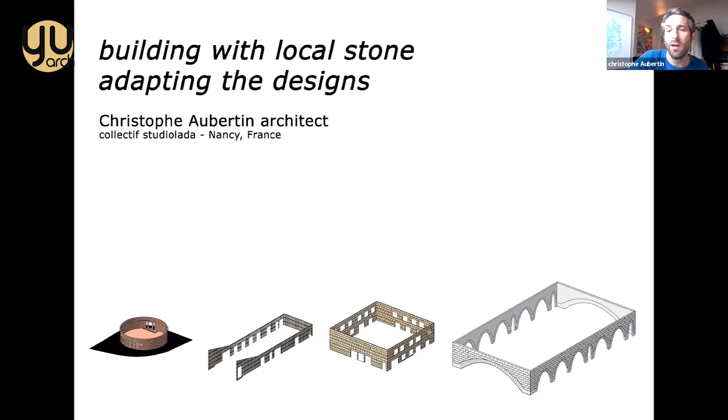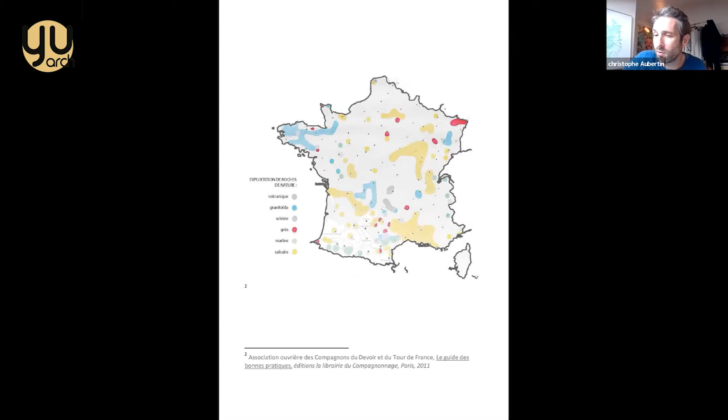And this is for footprint and sustainable conditions, but it is also because I think that it's interesting not to have the same architecture everywhere, and to find different cultural and different design materials according to the area where you are.

So, for example, we built one building here and one building here in Vaucouleurs, and we used limestone from this quarry very close by to build this one. For another building in the same area, we used this stone. So all this is very close, and these three buildings use limestone, like white stone. This one is in the north where there is a special limestone with a yellow color. So my partner Benoit built this building with this yellow stone.

And here it is another area. We are here, and here we use this stone. This is sandstone, pink sandstone, to build this building.

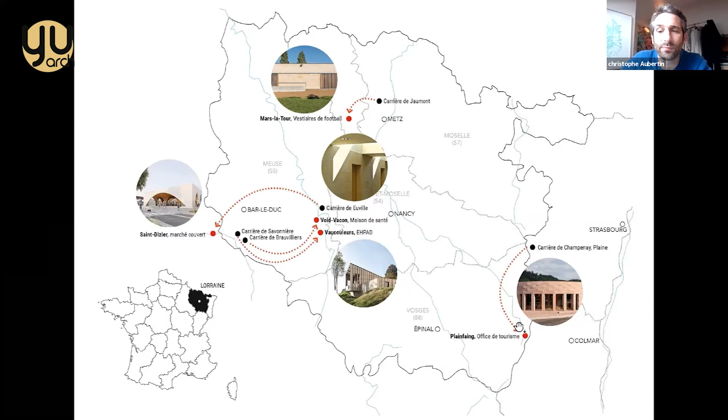Okay, so the first building that we did with stone was this one. It was 10 years ago, and it was a health center in a village in France, for doctors and nurses and this kind. And we were in the area of limestone. We decided to mix the timber and stone.

So we decided to put the timber outside. So a wall, like a frame, balloon frame wall structure outside with a lot of insulation, and to get the stone inside. So inside we just have this big wall like this, linear, built with stone blocks. And also the floor here, which is covered by tiles, stone tiles.

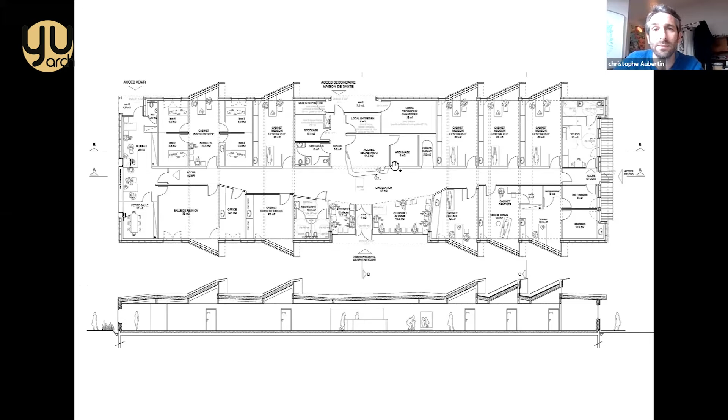So it's interesting to get the stone inside the building because we don't have to put insulation on this wall, so we can see it on the two faces. It's beautiful. It's quite expensive, so we prefer to see it on the two faces.

And also it is interesting for the thermal way, because when you have massive blocks inside, it keeps the thermal ambient inside. So it makes like inertia, I don't know the term, but it keeps the heat or the cold inside. Inertia, yeah, that's it. So this is our wall.

First, we wanted a wall like Gilles Perraudin, like 50 centimeters thick, but it was too expensive. And the good equilibrium was to take 22 centimeters. So we use this. In the bottom, we put 2 ranks of cellular concrete, because it cuts the cold coming from the floor, from the earth, so it doesn't come inside the wall. So that's why there are these two ranks of cellular concrete.

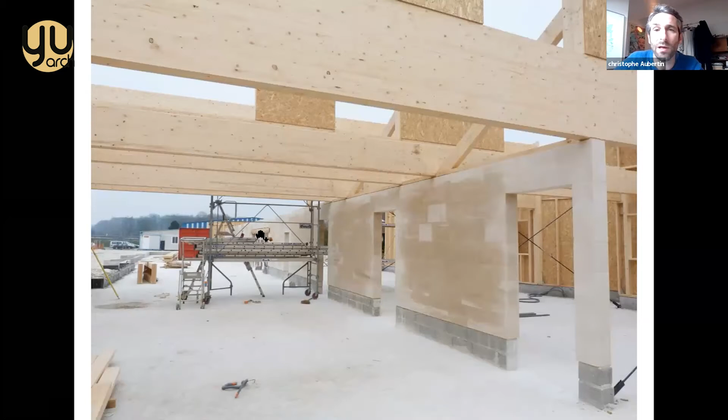And then it was really simple. We put these blocks, and on it we can put these big beams in timber, and the stone wall carries the timber beam. This is important. And one thing important here, we were not in a seismic area, okay?

But even in France, even in a non-seismic area, the new rules tell us to put reinforced concrete in many places in a wall like that. So usually you have to put concrete inside the wall here. So you do a hole, and then you put concrete and steel inside. But in this wall, we could talk with the guys to check the normative things, and he accepted that this wall was only in stone.

And we had also guys to build this wall that are used to historical buildings, and for them it is not necessary to put steel. So this is only stone blocks like this, and this is the way that we finish the building with this material that is very important, interesting.

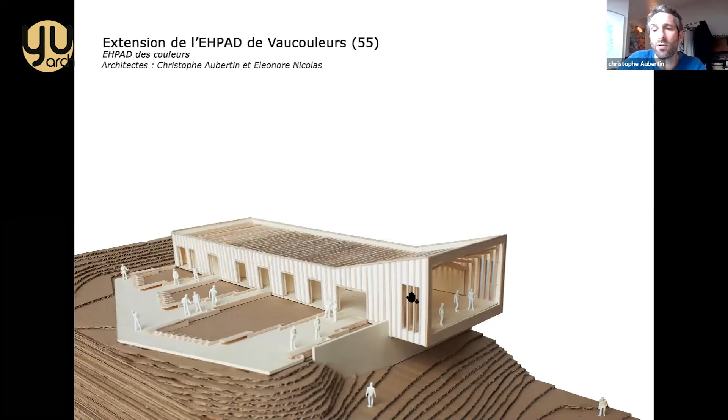So the next project is in the same territory, in the same area, like 15 kilometers from the first one, and it is a building for retired people. And here it is just an extension for the big retirement center. And here we decided to use stone again, because we are in the area of stone, and there are some quarries. And we decided to build in wood.

And also the director of the client, for the users of the building, told us that they don't want wood cladding outside of the building, because they don't like how timber will get old and get gray and all that.

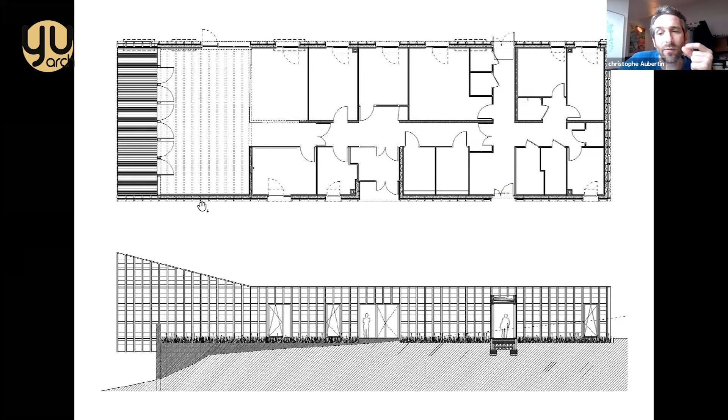So we decided to do the opposite of the first one, and to put only wood and timber inside, and to put the stone outside with only cladding. So this is stone cladding, but coming on a wall with a timber structure.

So this is not simple. This is particular because usually you can put stone cladding only on concrete walls, because concrete walls are very strong and they don't move. A wall in concrete doesn't move at all. But a wall with timber structure always moves just a little bit, and this movement can make a problem for the stone, because it can make a torsion and it can break the stone.

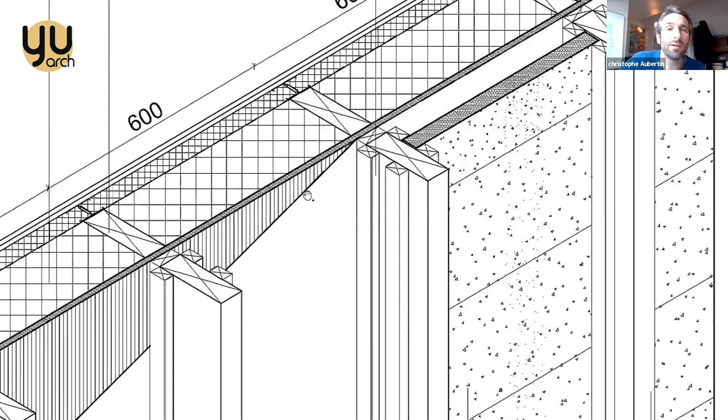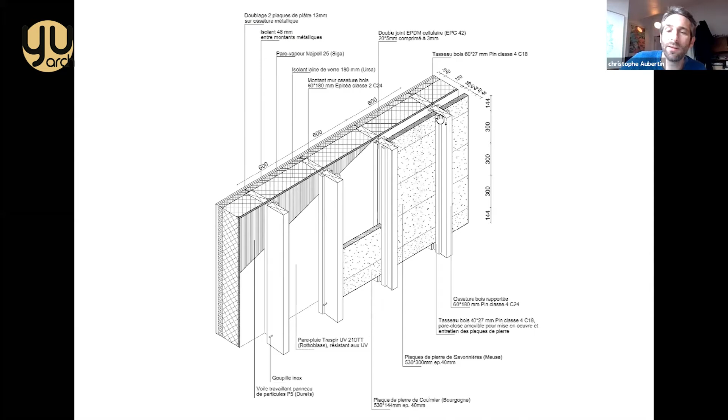So we had to propose this way. This way is quite simple. It's only to put wood columns on the walls with two little pieces of wood, and we put the stone tiles inside this small place like this, and that was not common. So we had to prove it and make a special certification to explain how to do it.

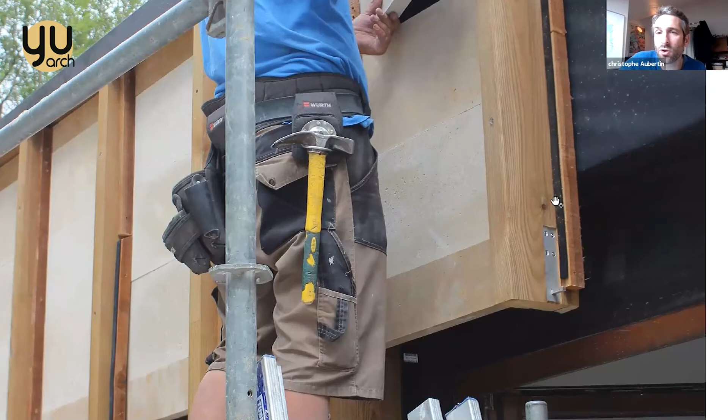You see this black thing is a joint in EPDM. I don't know how to tell it. It's kind of plastic, but a kind of joint to maintain the stone and to be sure that it will always be maintained and not get problematic. And this small piece of steel also carries the stone.

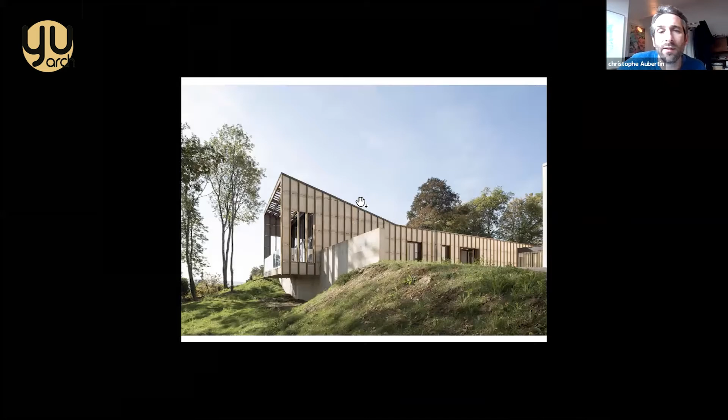So this guy is on the way to put the stone, and then we get this kind of architecture. So we have a wood building, but outside we get the stone tiles on the facade with these lines. This is very important. These vertical lines in wood.

And I think that this kind of facade is very interesting, and everybody was happy, even the users that don't like wood. This kind of solution with like 10% of wood and 90% of stone is a way that everybody loves. It's only natural materials, and it will get old very well. So that's why it was interesting for us to try this way.

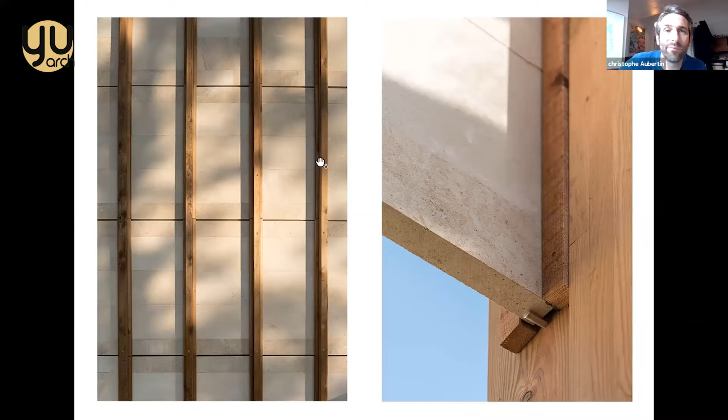So you see that you get small joints to get the ventilation coming on the backside of the stone, and to be sure that there is no humidity, water coming in the wall like that. So that was a way to use stone also in an economic, pragmatic, easy way. We just used it 4 centimeters thick, so this kind of cladding was not very expensive.

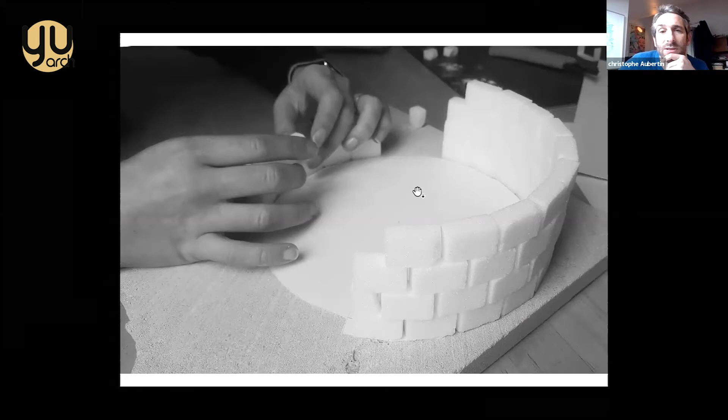Then the third building was another one. So we changed the area. We are in the mountain, and in the mountain we get this sandstone, a pink sandstone. And this building is a tourism office, to inform tourists about what they can visit, what they can do, also the natural area of this territory. And we wanted a building that has a special architecture, like a signal. So we decided to do it in a circular form.

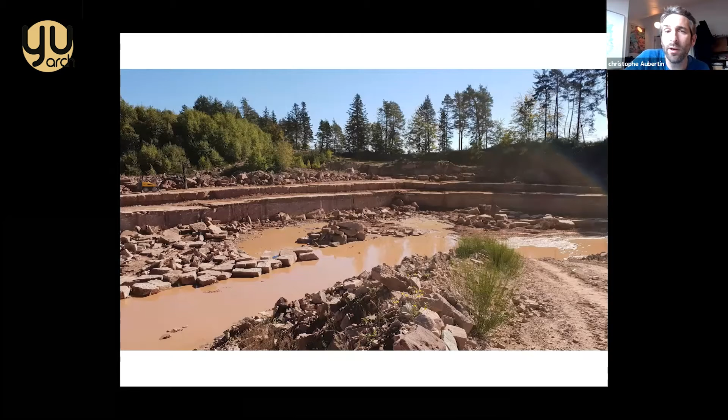And since the very beginning, we decided to do it in stone and with a circular form. And the only idea of this building is to use blocks and to make them in a curved way. So it makes this kind of, I don't know how to express it, but it's kind of shade and pattern.

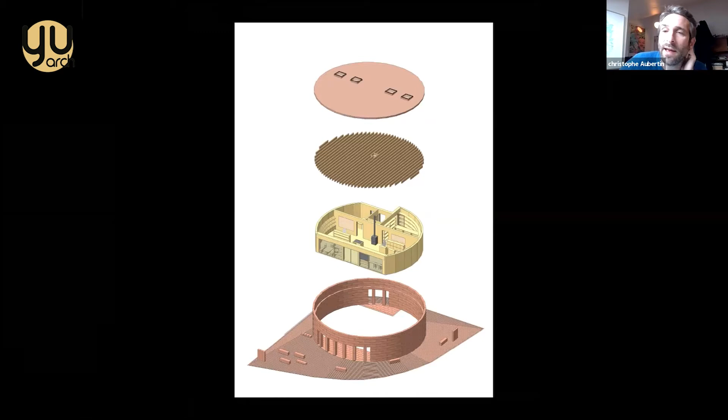And so we went to a quarry really close from there, and told this guy we wanted to build with sandstone. They said, okay, we can build with you, and we wanted big blocks. And they explained to us that the biggest block that they can provide is a block that is 140 centimeters long and 35 by 35 centimeters thick. So this kind of block was the module, the unit.

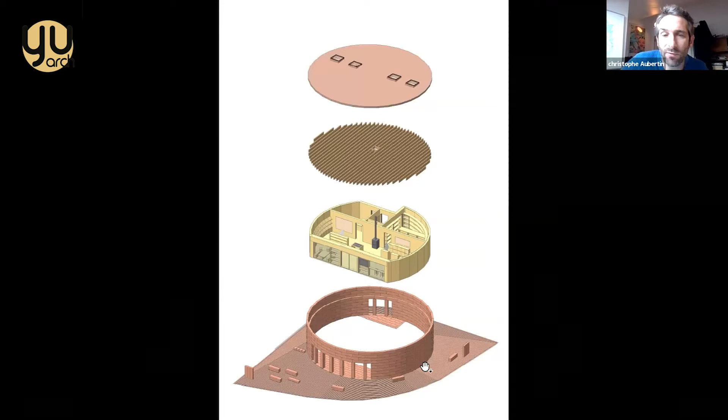And then we designed this shape. It's very simple. There are 10 ranks of stone, 10 by 35, so it is 3 meters 50 high. Then you get the plan, and we have 32 blocks, 8, 8, 8, 8, like that. And then you have some parts where you have columns, so you have half blocks. So it is really geometrical and simple to design.

You have parts with insulation. We are in the mountains. It's cold weather, so we get insulation everywhere. And we have this part where it's just covered, but outside. So here you can see the stone outside and inside. It is the same way as for the first one. We know that stone is quite expensive and very beautiful, so we try to show it, to make it visible as much as possible.

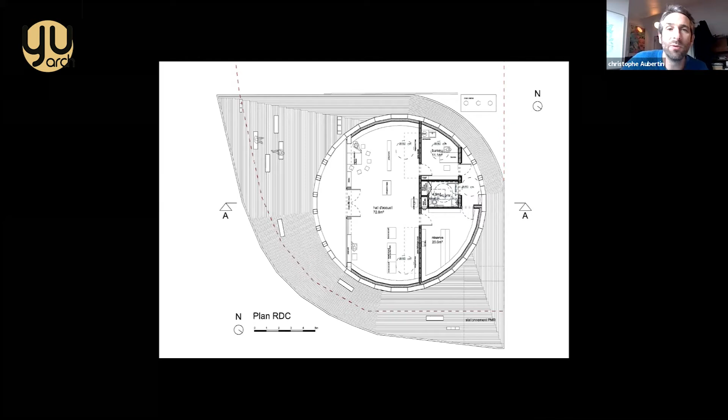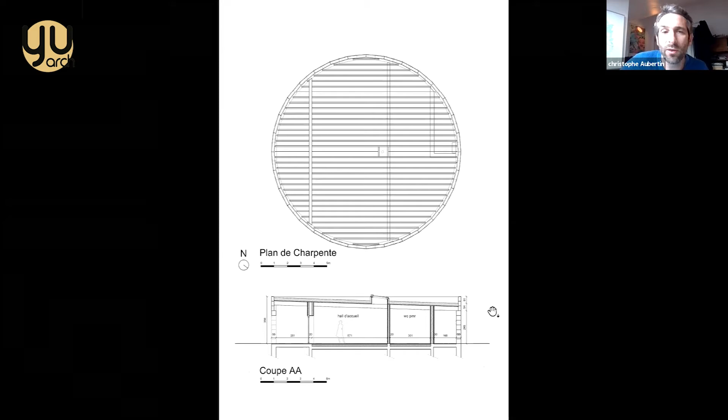This is the structure for the wood roof. So very simple, flat roof with just a small slope. And here you get 7 ranks of stone, 35 centimeters, and 3 ranks more thin. So you can get the timber beams coming here in this simple way. And here it is concrete like that.

And also on the top, we wanted to get the stone until the top. We didn't want to get this metal sheet to protect the top of the roof. So we decided to have stone blocks like that to protect the top of the wall.

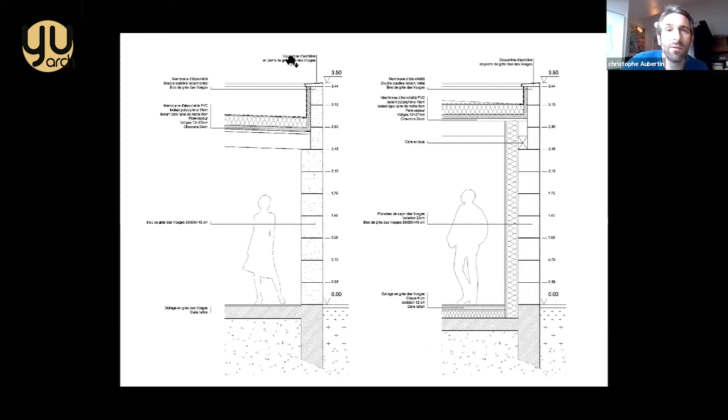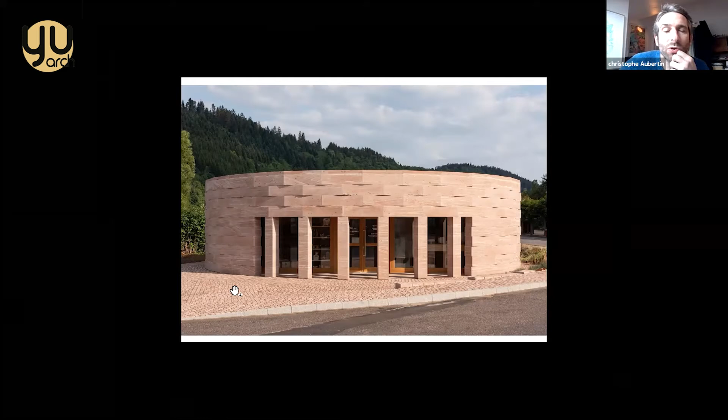So it's like this. Here you can see the stone on the top and the 10 ranks, like this. And inside, everything is built in wood. It is like a very opposite ambient. Outside only stone and inside only wood, and the heat and this feeling to feel hot and comfortable.

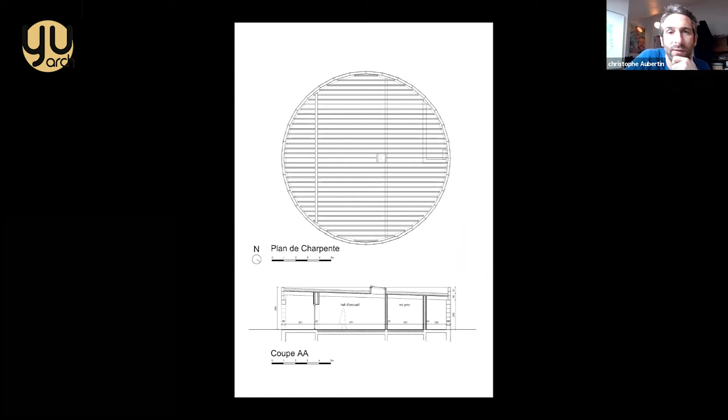Also, you asked to talk about the seismic part. So in this building, the circular form was a good point for the seismic problem. Here we have a seismic problem in this area. So the first thing was that circular shape was a good thing, and we got a negotiation with the guys, and they accepted to only have

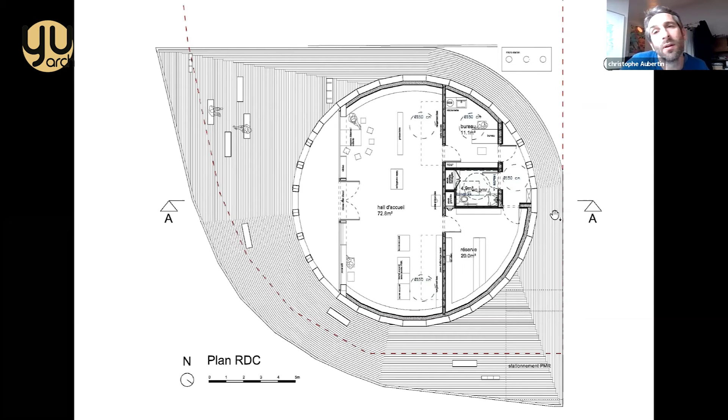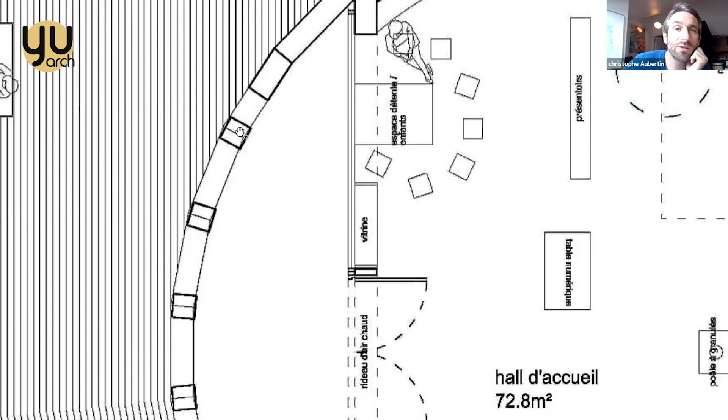concrete inside the columns. So here you do a core, you do a hole of 10 or 15 centimeters diameter on the whole height of the columns, and then you put some steel and then concrete, so it reinforces these columns. So every column gets this, and also when you get the wall, you don't need vertical reinforcement in the wall, but only on the extremity.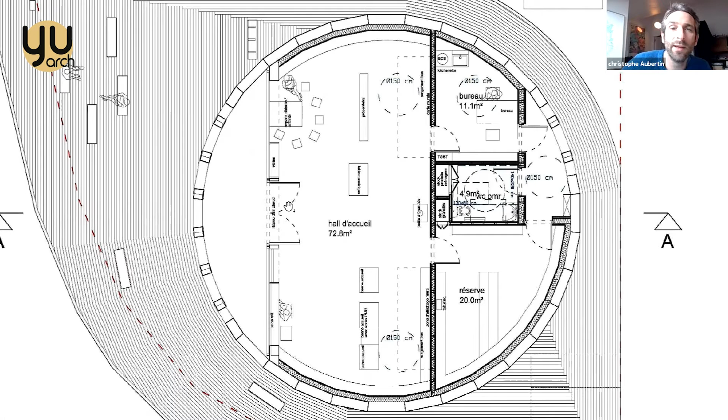So here, 1, 2, 3, 4. Here we did the same as in the column. We put concrete and reinforcement. And also horizontal reinforcement. It doesn't appear here, but we get one here. We did a reinforcement in the joint. So we make a thick joint. Instead of 5 millimeters, it is 2 centimeters here.

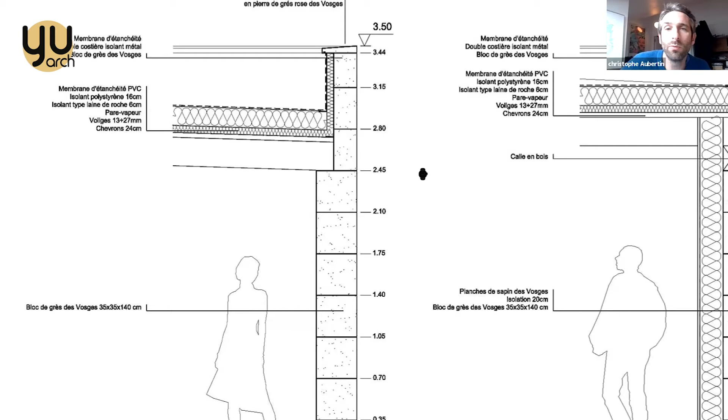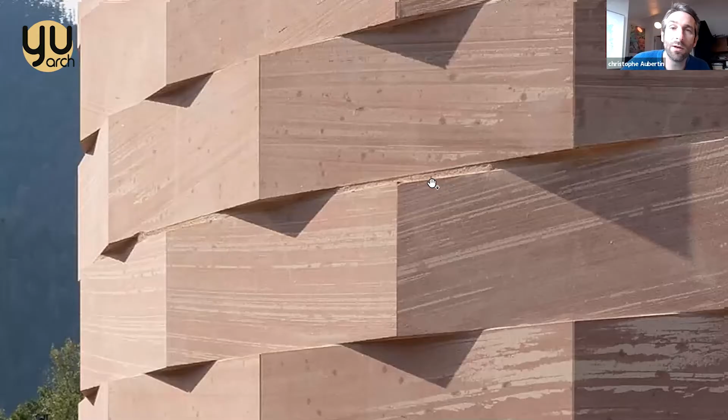And in the mortar, we put some steel grid coming inside to make like a circular and horizontal reinforcement. So there is one here and also one at the top of the building, just under the stone. So you will see it here. If you look at it, it's just here. It is more thick. So here there is a reinforcement instead of only 5 millimeters, and also here. Here it is more thick, and you get the metal grid.

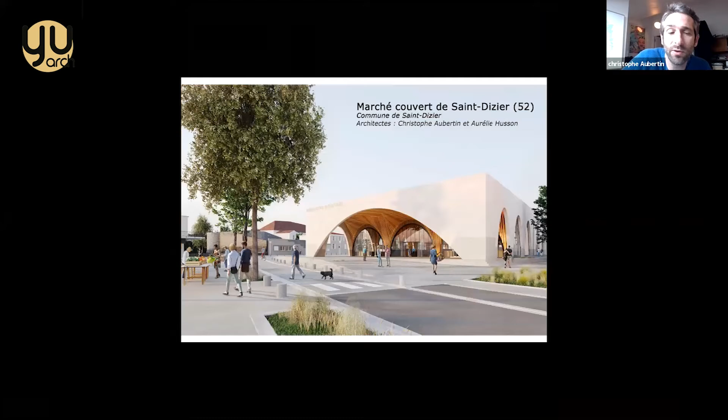So this is some ways to put this reinforcement without putting too much concrete. Otherwise, if you listen to the normative advice, you just build like a grid in concrete, and then you put a little bit of stone inside the grid. But we don't want that. We really want to build stone walls.

Okay, so the next project is this one. We are building this one at this time. The first stone blocks will come very soon on the site. So it is a market, a municipal market in a city called Saint-Dizier. And for the competition, we proposed to build it in stone, because this is a historical city where a lot of buildings are built with this stone, limestone, very beautiful, very classical. But we wanted to make a contemporary modern building using the same stone as the historical one.

And we wanted to make arches. So that was very important for me. I love the design of the arch and the vaults and all this traditional way to build with blocks. It can be stone blocks, it can be bricks, but I really love this way to use curves and to use this kind of shape to make buildings. So this is an arch, and I hope that one day I can build a building with a vault.

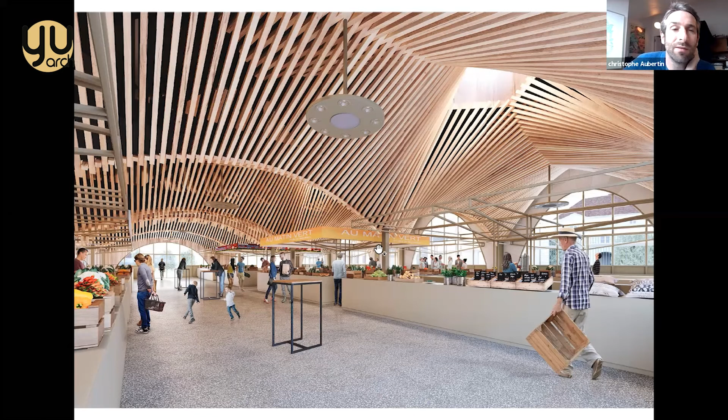So concerning the arch, we knew this big arch on this project from Renzo Piano in Italy, the Padre Pio Church, where they use very big blocks and a big arch with stone. But it is quite a technological way. So you have a lot of steel components with a steel board here, and then they put blocks inside. And then from the steel board, they can put these steel pieces to carry the roof of the building.

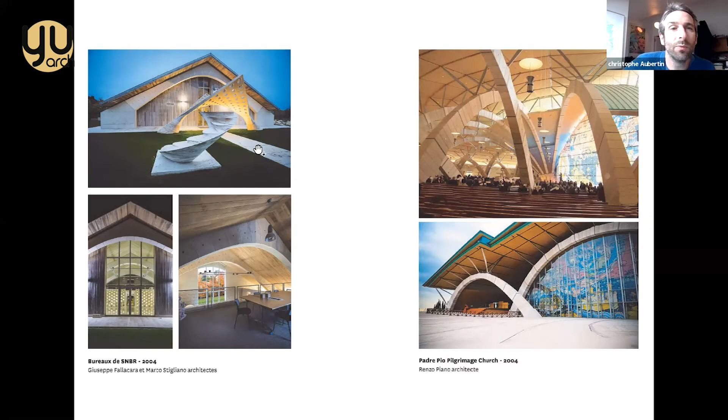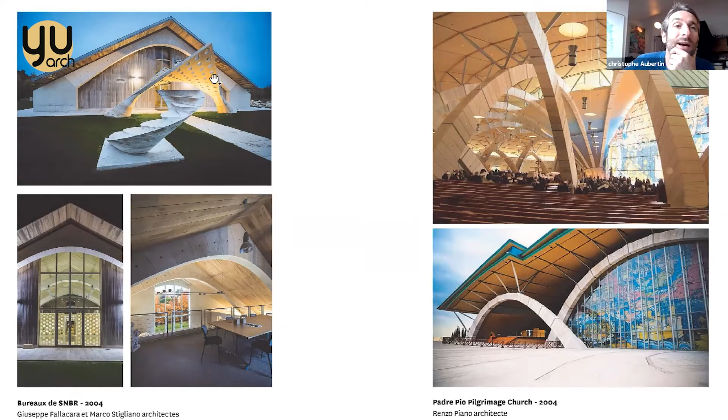So you get the stone and steel mixing, making the structure together. And we have these guys. This is very close to our area. I didn't know this firm before, but I knew it from some friends, and we came to visit their buildings. These guys are stone builders, they love stone, and they built their building some years ago, and they make this big arch with stone.

So this is concrete blocks here and here, and then it is stone blocks with a very special shape, and they can do it in a very traditional way. So it's only blocks. And this is the key of the vault coming on the top. When you put that, everything is maintained. To build that, you know this traditional technique: you do a wooden gabarit, a wooden structure to maintain it during the time that you build.

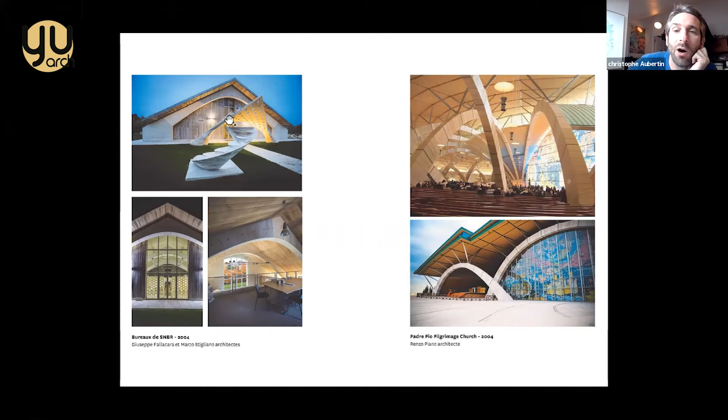So you put all your stone on the wood structure, and when you put this one, you take off the wood shape, and then it is maintained by itself. Then you take the wooden structure and build the second arch, then the third, then the fourth; you can use it for the other ones. So that's why we thought, okay, we have a firm with important know-how, and they can build our building. So let's try to propose a stone building with this particularity, with these arches.

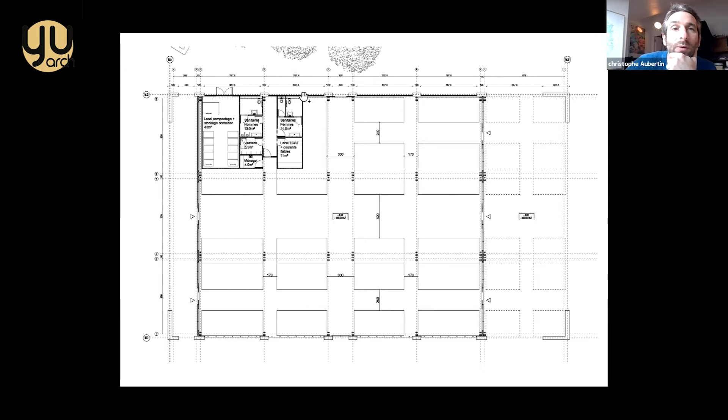So this is the plan of the market, very simple. Big arch here and here, middle, middle, middle, small, middle, middle, small, and the same here. That was the facade we designed for the competition. It was quite fast for the competition, so we decided to do this kind of shape. This is a parabolic shape, and that was a basket handle shape for this one. That's what we thought, and then it changed during the study.

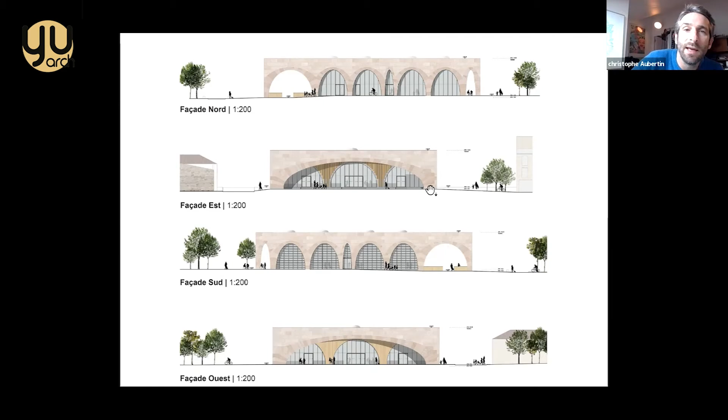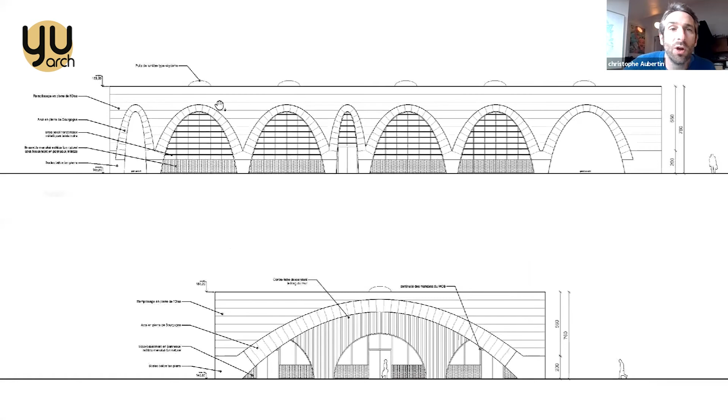After we won the competition, we designed it more precisely, sharper, and we did this design. So the big one, middle, middle, middle, and the small. Here we changed the shape of the big one, and they are all the same arch. They are all parabolic arches, with small, middle, and large dimensions, but it is the same way to do it. So you get concrete here, the arch, and then stone here, but this is only stone blocks, horizontal, coming on the arches. This wall is 60 centimeters wide, and this wall is 40.

And we are happy also because we were scared we would need steel inside the arch. That would have been possible, it could be necessary, but we could explain and calculate to say that we don't need steel, and we are very happy to do that only with stone blocks in a very simple and traditional way. Then we have concrete blocks here, and we cannot see it, but we have a very important concrete beam in the ground with a lot of steel inside to take the traction, the pushing of the stone here. Here you have a beam in tension.

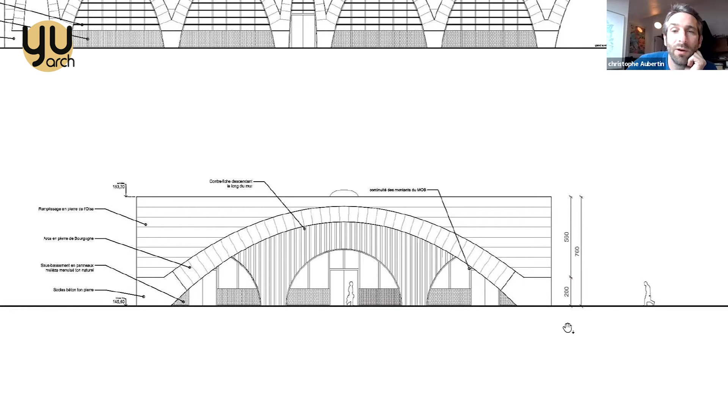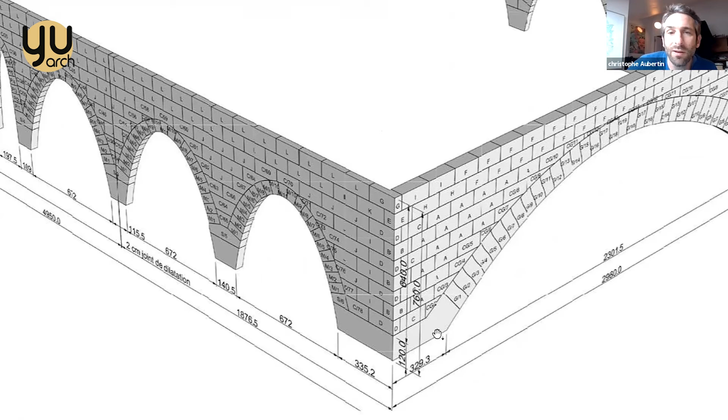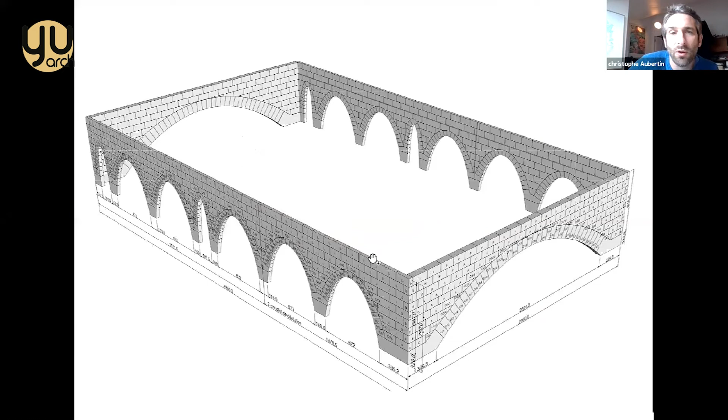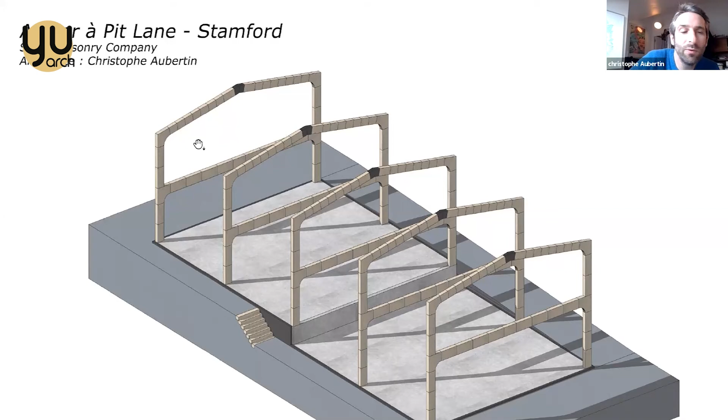And after that, the Stone Masonry Company wanted to build a new building for the firm. And so they asked me to work with them and the engineer, Steve Webb, to build this structure. And when we had been to the exhibition, they put that on the front of the building. So you can see that it is very important, and it is not common. It is very big beams. You see it's like 12 meters, and it is only made with stone blocks like this.

Okay, so you make these beams, and you put all the stone blocks near to the others, and then you have steel cables going all around the beam, coming from this part to the other one. Then you have a steel board, and then you make it very strong. You make it to maintain the stone blocks. And like this, with these 4 steel cables, you can have these big beams.

And this is very interesting because you make a kind of concrete beam, but with stone. And you can see that for 12 meters, you only have 60 centimeters high. And so this is a very performant and economical beam. So very nice. I was amazed and interested by this technique. And then they proposed me to work with them for their own building using this technique.

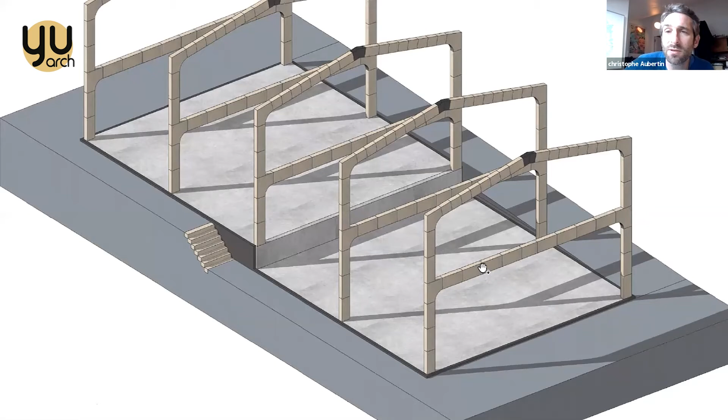So you can see this structural portico with columns and beams like that. And so everything is maintained with these steel cables inside and stone. And so you just have 25 centimeters large and 50 centimeters, I think. So you can get these beams like that. And I'm very happy to build one of the first buildings using this technology in an economic way, in a cheap way, that you can use again. You can reproduce this technique.

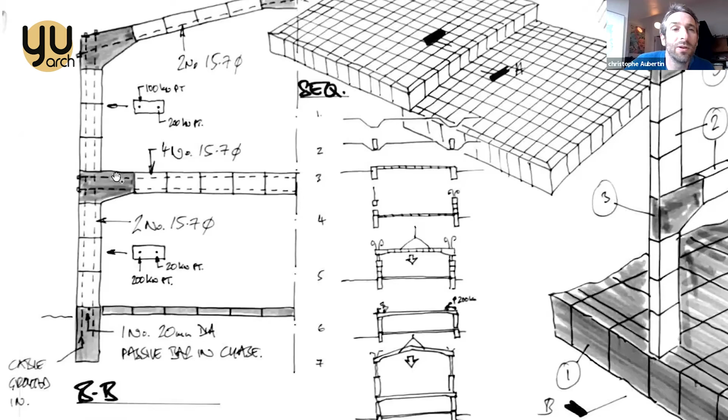So this is the details from Steve Webb about this technique. And here it's interesting because you get the columns. Here you can see the steel cables, the vertical one, the horizontal one, okay. And this piece is more important. You get more strong stresses inside. So this stone has to be stronger. That's why they use granite for this piece, and this is in limestone, because granite is stronger.

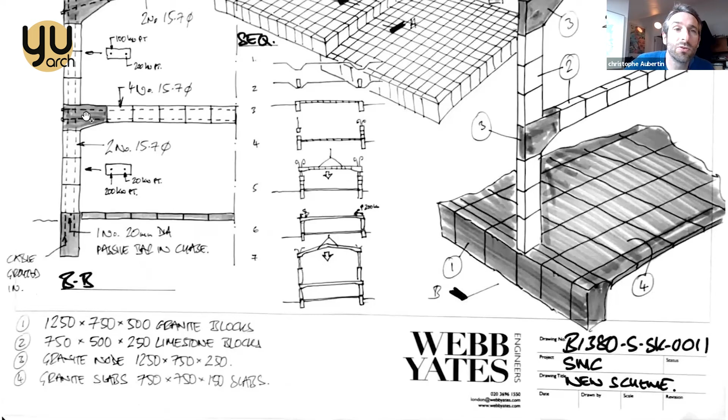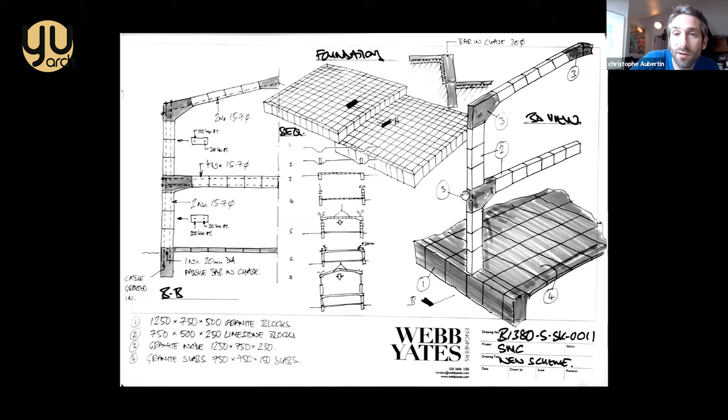So you just put granite at this part, and this is a very logical and simple way. So you get granite here, limestone, granite, limestone, and we can propose a new way to make structure with a very light quantity of stone material. So it can be done with a small budget.

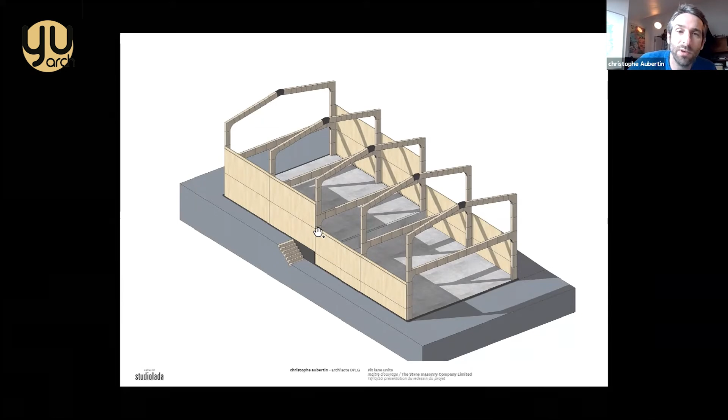And then to continue and explain how we will build. So we didn't start to build it, but we will build the building. So we get the 5 porticos in stone, and then we put wood panels with insulation to make the facade everywhere like this. So big panels. We do also the floor and the walls inside, the stairs, everything. And then we do the whole shape of the building,

and then we just have to make the cladding and the protection outside. And here we just wanted to make it cheap, so we get steel sheets on the roof, and also on the top of the facade like this, like black ones. And here at the bottom, we wanted to use this technique that we used from Vaucouleurs, from the EHPAD. So only with wood columns and the small stone tiles coming inside.

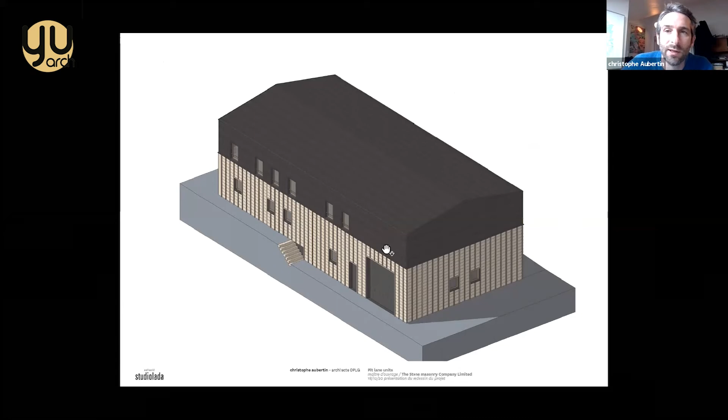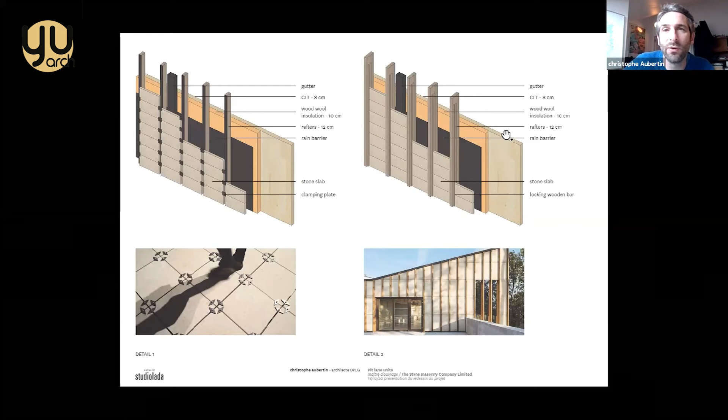So we hesitate between this way with this small sheet of steel to maintain, or this way only with wood. So that is what we are doing now, and that's it. And I finish my presentation on it. I will stop sharing my screen, but you can see that we try to experiment and to find a different way to use stone materials to build. And so that's it, Mathieu.